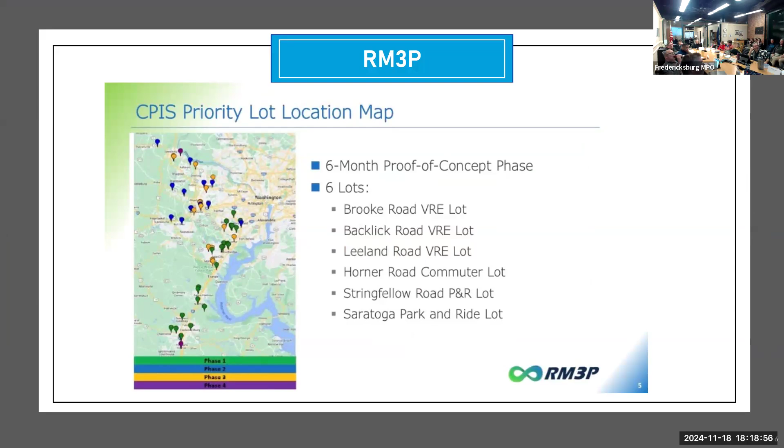Thank you. Eventually it will cover Fredericksburg and VRE, correct? Okay, gotcha. We gave them a list of all the park and ride lots. Perfect, so that's all covered, assuming that it works.

So it's working at a university campus right now, so we're assuming it will work here as well. But it is fairly new technology. It's not often that state institutions adopt brand new technology, but in this case we are. So far, so good, seems to be working.

Let's see what happens. What does it use to count the cars again? Is it phones, you said? It uses phones to locate how many vehicles drive in and out of the lot, so it can calculate the totals of vehicles in the lot. And they subtract that from the available spaces, then they send you the information to your phone.

If this is successful, would there be opportunities for localities and other groups that run public parking lots to link into this? I'm thinking of the city, we run parking garages, and if it was all on one app for the whole region, that would be convenient.

I don't know that it works then, it also collects money. There are some apps like at Virginia Tech, they use Park Mobile, and that doesn't tell me what's open, but it takes my money. I'm just thinking in terms of providing availability data.

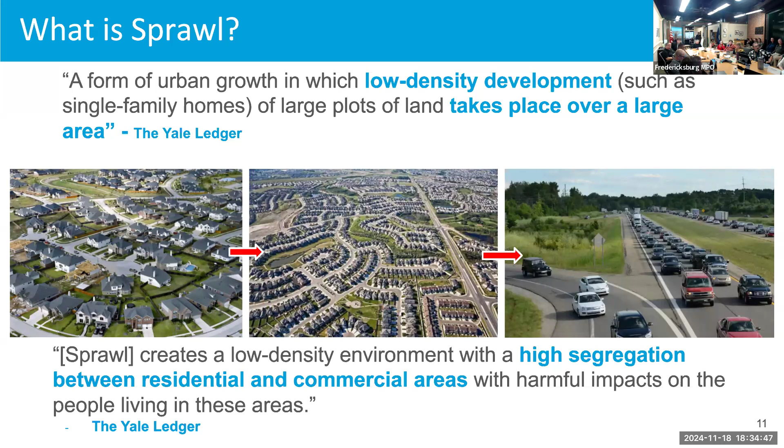But what does this have to do with transportation? As these developments are spread out, the distance to get to the destinations you're trying to reach in your day-to-day are further away. Also, I think a key characteristic of suburbs are cul-de-sacs - a lot of times these residential developments are all kind of isolated off of one main route. So you have farther to go, and all of these developments built up along that one road have to use that one road. So there are more cars on the road because you have to drive everywhere, and all those cars on the same road can lead to congestion, like we're thinking about now with the new travel demand model and the maps we've been putting out.

So it does definitely have a link to transportation. To contrast that, we can talk about dense development. The D word. And what I want to emphasize, and what I've really enjoyed reading about looking at dense development, is actually how diverse it is.

I think those who are averse to dense development have this one giant apartment complex in mind, maybe brutalist architecture. But there's a lot of different ways we can achieve density in development. It's not just apartments, but garden apartments, multiplexes, multifamily housing.

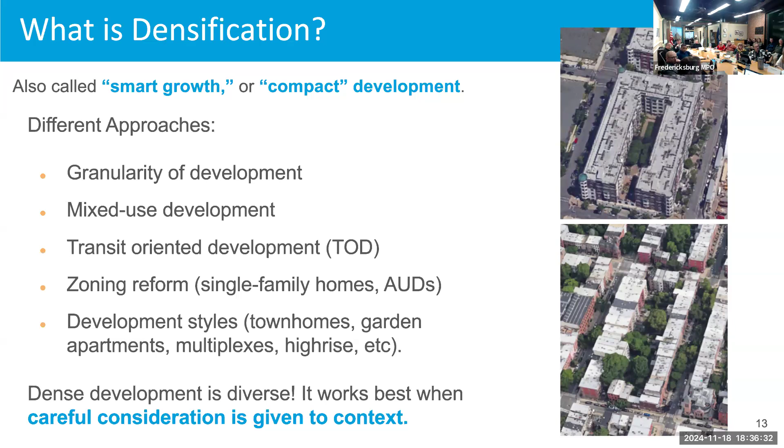And also what I've really enjoyed reading about specifically is granularity of development. So I'll go to the next slide, which has some photographic examples of dense development. These two are in Hoboken, New Jersey, just across the Hudson River from Manhattan. And this middle image is from Georgetown in DC.

You can see here this granularity I was talking about, where this whole block was developed by one person creating all these units, rather than the more diverse ownership of just splicing up the land, but still making development dense on that same land area.

The same can be said for different uses of development, like if these are all storefronts. It essentially condenses the destinations of where you're trying to get. And so then options for travel like transit and walking, biking are a lot more viable. They're possible in these communities, when in the suburbs it's a lot more difficult for those to be viable transportation options.

Chickens. On the roof, yeah. Have you got chickens?

That's another great thing about dense development, is it also really preserves open land outside of the urban center. We have a lot of people — just in our region we can think about the population growth that is projected through the year 2050. And if all those people want their own home with their 1 acre or however much land, we won't have these swaths of open land anymore.

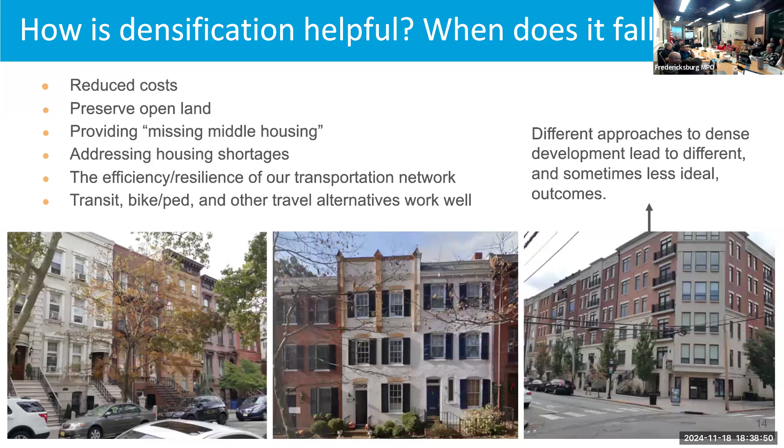So that's my presentation, thank you for that. There's a lot to it — we could probably debate this till the cows come home, because it's like poking a bear for me. So thank you for that. I need to come down from my little anxiety attack I'm having right now.

You'll know that we as FAMPO can't tell jurisdictions what to do, but we just remind you of what's going on around you. I know what they're moving away from, but that red is what we worried about. We have very diverse counties here, and while I'm appreciative of anybody who desires that kind of thing, that isn't the vibe that I get. I mean, Chris and Drew can say that's not true if they feel that way, but I feel like I need to apologize by saying that.

Let's — but thank you for that. Yes, thanks, Leda. If you have any data regarding everything that you were just telling us, could you send that to us, or have someone send it?

Sure. Then to the converse, have you done any research on land conservation and not increasing land development and density? So like if we did one house per 6 acres, did down zoning, limited the number of houses that can be built in a locality — how that could reduce traffic, and then used the offsetting funds to do land conservation. So if we're going to take one side, I would like information on the other side.

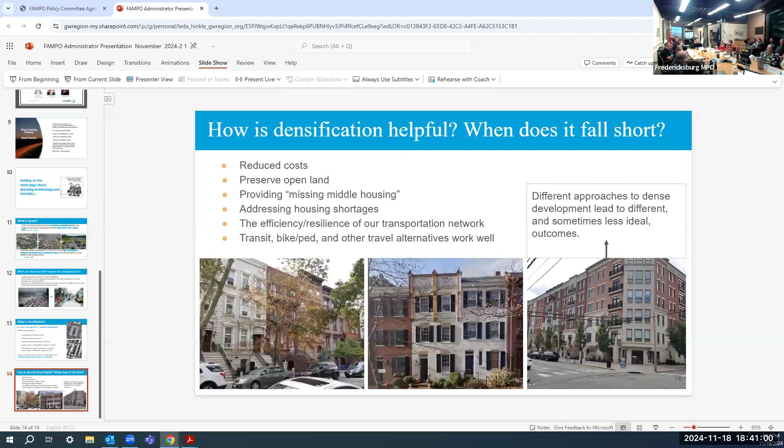Because if you can't spot any difference, then we're wasting our money and our time. But there are some differences, and Leda's going to show you that we've done some work to help you find those differences.

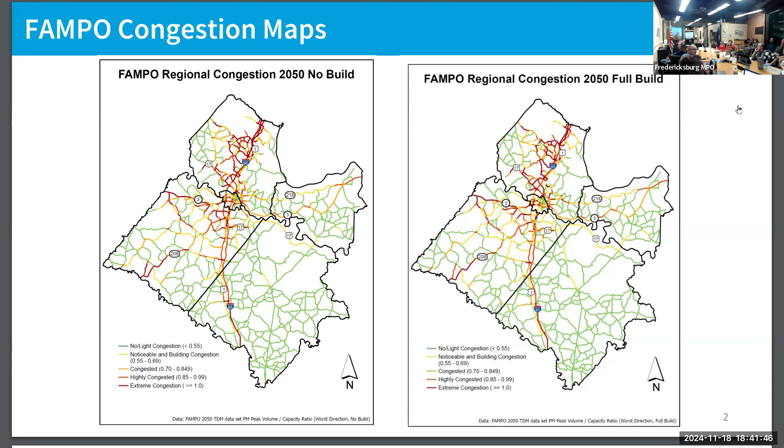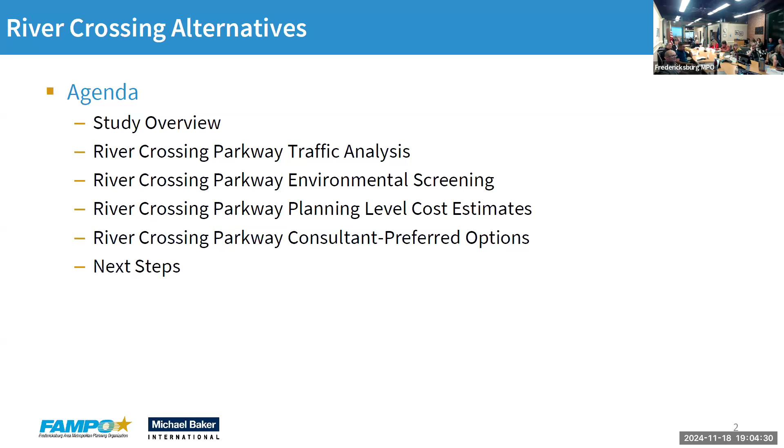So as I was saying, I want to talk through the traffic analysis, we'll get the environmental screening results. We have some planning level costs that we're going to present to you. They were not used in the screening, but we'll share those for information. Then we'll wrap up with the big reveal, which is our top two options based off of what the data and our work is showing us.

Just a reminder for anybody that doesn't know why we're here: we're studying an eventual NEPA certification of a preferred alternative that will hopefully ultimately lead to a funding application for a new river crossing west of I-95 across the Rappahannock River. So the study area is this area just adjacent to I-95. We're not looking way out west, but that's been done before.

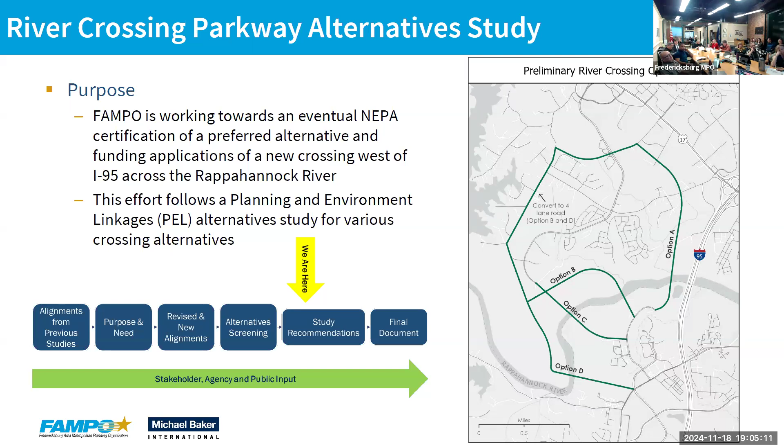So we're moving forward, we're at the study recommendation phase. You can see the steps here. We've identified a purpose, reviewed the alignments, done our alternative screening. So we're not final yet. Keep that in mind, we're not final yet. We're just at the recommendation stage.

One thing I wanted to update you all on: when we went out to the public the first time, we took the four alternatives that we showed you a couple months ago, which was a little washed out, but we had an option A, a B1 that came up this way, a C, and a D.

When we went out to the public and worked with the stakeholder committee, we were informed that option B is going through some prime proposed development areas, so that's not happening. We came up with an option B2, which would avoid that area where we're seeing anticipated proposed development. It still uses the same termini, so it doesn't impact.

Can you give us a little bit more, because I cannot see that. So I see I-95, still golf course property, still golf course if that's helpful. Celebrate Virginia Parkway here, Carl D. Silver, the 17 is up here. Where's Fredericksburg - down here.

City development that got approved after we started the study is around between that mustard line and the purple line down there, just further south, right on the river.

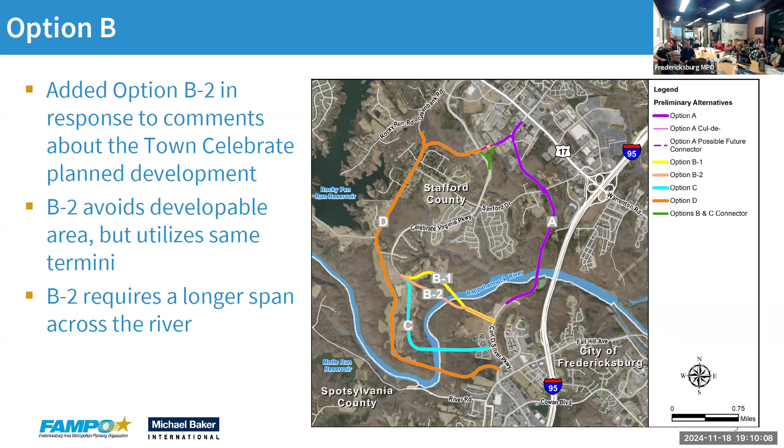All right, I've got it all on the map here, but this is probably harder to see. But anyway, if y'all have questions as I'm going through about which one's A, B, C, D, just stop me and ask, and I'll point to one here to remind you all. Essentially they go east to west, A to D.

Okay, so from the traffic analysis standpoint, what did we do? We really had two main sources for doing the traffic and operational analysis. We looked at the regional travel demand model, the same model you all use for your long range plan, the same model you're getting outputs from that you're talking about tonight. So we looked at that to see what the demand would be on the new river crossing, and whether there's justification to move forward with this, and will this attract traffic. Then we looked at what's referred to as micro simulation, where we get down a little more granular to see how this will function, not just with each alternative, but how the whole network will function with each of these alternatives. We'll go into that tonight as well.

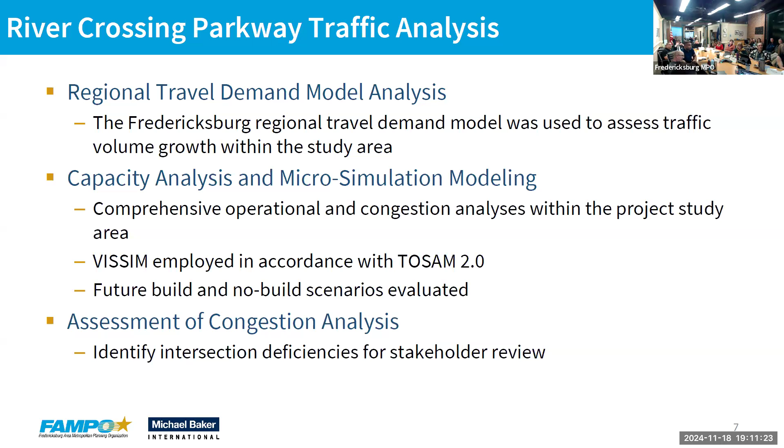So I'm going to start with the findings from the travel demand model. The question we're trying to answer is, how much traffic might this attract? And the answer is a fair amount. Looking at a new river crossing at the various options, we're seeing between 7,000 and 8,600 vehicles during the PM peak period using a new crossing.

So you can see the numbers in the graph here. Option A would attract about 7,000. B1 and B2 are the same because they have the same termini, at 8,590. Option C, 8,170, and option D, 7,895. Most of this traffic would be passenger vehicles. We estimate less than 2% of vehicles will be trucks, so most of this is passenger vehicles.

The principal volume shifts that we would see to the new crossing would be from US 1 between US 17 and the Route 3 intersection with I-95, and then the I-95 local lane. So we would see the most traffic shifting from those facilities to a new crossing.

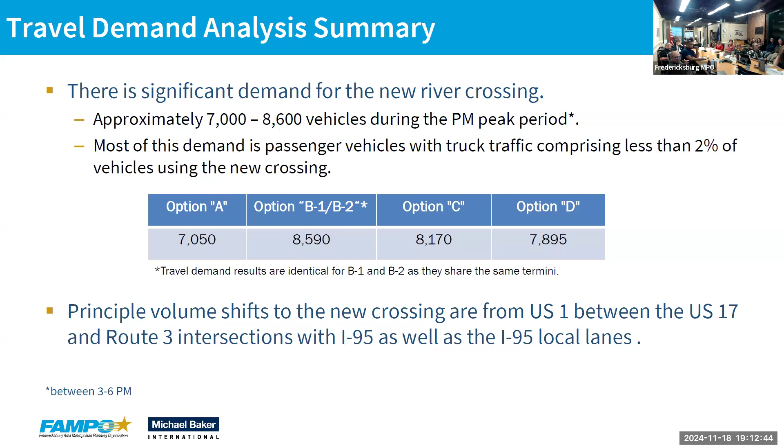Looking at the micro simulation, as I said, we drilled down and looked at how all the intersections within the study area would operate. This is your 2050 PM peak hour. Basically what we're seeing is the no-build in this first column here, and just looking at this, you can see there are more reds in that column than anywhere else. So the good news is that implementation of any option is going to reduce the average delay in the region and enhance the overall operational performance of the network.

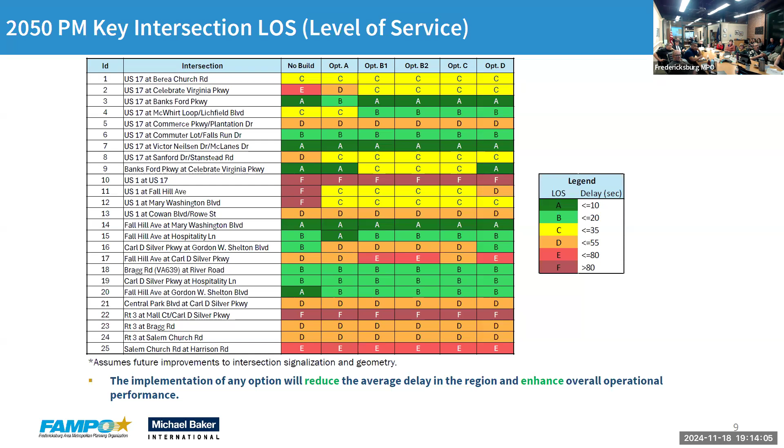And let's see what this looks like. We talked about volume to capacity earlier. The way we look at intersections is level of service, which we measure in seconds of delay. Delay is defined as how long you're sitting there in excess of normal travel conditions. So if you're sitting there for less than 10 seconds, you're level of service A. Once you start getting over 80 seconds, you're in E-F territory, and that's really where you're not moving at all. So really what we're trying to focus on is getting rid of those E's and F's in the network.

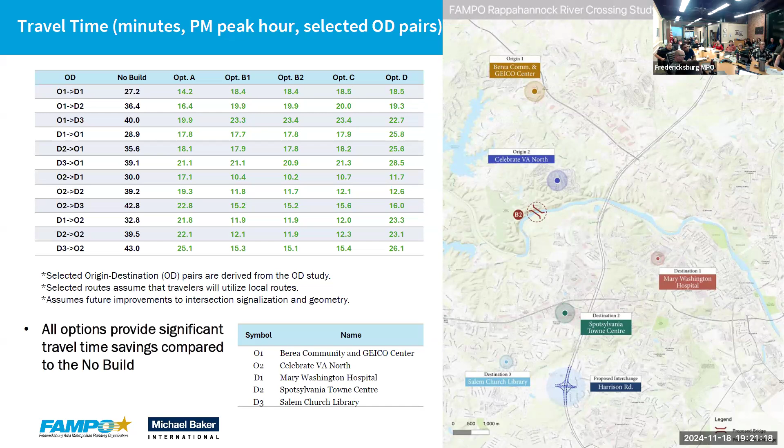Okay, moving on to the next factor, the environmental factor.

The way we did the environmental analysis is we took a 250-foot wide study corridor and applied that to a map to see what we're hitting in that corridor. But one thing to keep in mind is that the actual facility is only estimated to be about 100 feet wide. So even though we're looking at impacts within 250 feet, the actual facility will only be about 100 feet.

The idea is that when you get to the design stage, things you're potentially impacting, such as someone's home, you have some ability to maneuver and do what's called avoidance. The representative typology we're expecting for this facility is a 4-lane divided road with a multi-use path. That's what we assumed, and that's how we came up with that 100-foot wide width.

Before you move off that slide, it's very important to grasp this: the study corridor is 250 feet wide, but you're not going to build a 250-foot wide roadway—you're going to build maybe 100 feet. Some of the impacts you'll see now in the environmental study won't actually happen; it's allowing for the maximum possible width, not what's actually going to be built. In none of the options would you build 250 feet wide. That's a key thing to know as he now goes into the factors. So they've taken how many properties will be impacted in the 250-foot corridor, which we would never build—so it's going to be a lot less than the numbers he initially shows you.

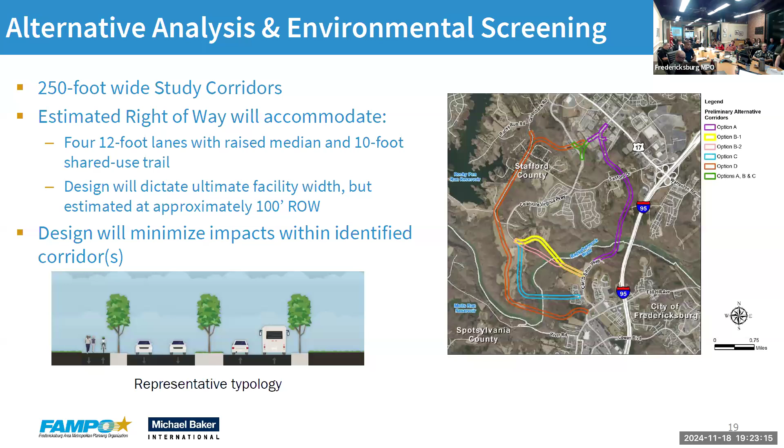Slide back a little bit. There we go. All right.

We used what's technically referred to as secondary data sources, which essentially means data sources from federal, state, and local sources. We followed the NEPA process—this is a planning and environmental linkages study we're using—so we want to make sure we're doing everything in accordance with that process, so that eventually, if we do get to a NEPA phase, we can hand that over and the data won't be refutable.

We separated the impacts into high, medium, and low by looking at the range and dividing it into thirds, and then we color coded it. Unfortunately you won't be able to see it well, but I apologize for that.

I just want to run through what we looked at, first off the purpose and need. The purpose and need that we discussed and vetted through the public and the stakeholder committee is whether or not a new facility would help establish an interconnected grid system of roads, establishing that north-south corridor on the western side of 95.

It would establish a new multimodal connection across the Rappahannock River, supporting bicycles, pedestrians, and transit. And would it create additional routes for emergency responders, as we identified a need for when there are incidents on I-95 and things go haywire in the region when you cross the river. So first off, all options supported the project's purpose and need, so no issues there.

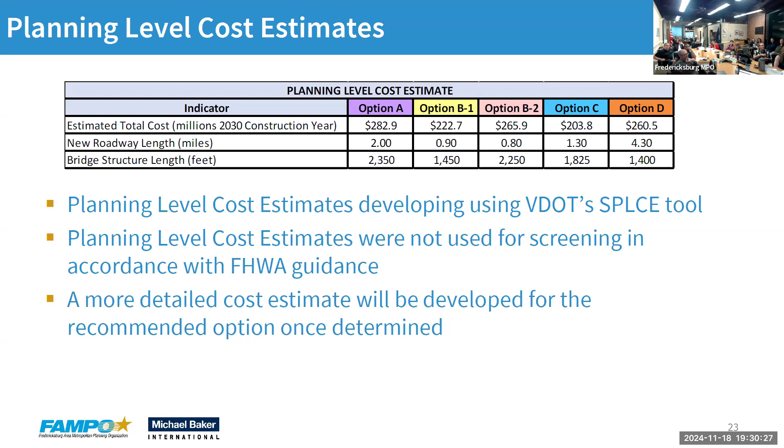And option A has that extra little bridge over Sanford Drive. Correct, which if another option were implemented at Sanford Drive, that could bring the cost down. So yeah, there are other options.

Okay, all right, the big reveal, the consultant preferred option. So going out to the meeting Wednesday, we wanted to have two front runners to try and really get input on the two that we think are the most viable. Of course, folks can provide input on anything. If they hate these two and really want option D or whatever, that's fine.

The first thing I want to mention is, off the top, we decided that option B1 and B2 were so similar in everything that we just saw that there was really no reason to advance B1, because B2 avoids that proposed development. They both accomplish the same thing, but B2 has a reduced impact on that proposed development. So right off the top, we decided that needed to happen.

Sure, so I just have a question about this proposed development. Who brought that forward to you? So we had county staff point it out, in the stakeholder group. And it's not by right? It has to be approved by the board of supervisors. It's one of the Del Webb projects that's in just the works.

I'm just curious, it's not a by-right project. I understand that, but you're acting like it's a good thing that we want to avoid it. I want to cut right through that. So why would you avoid that option? I'm just like, who gave you that direction?

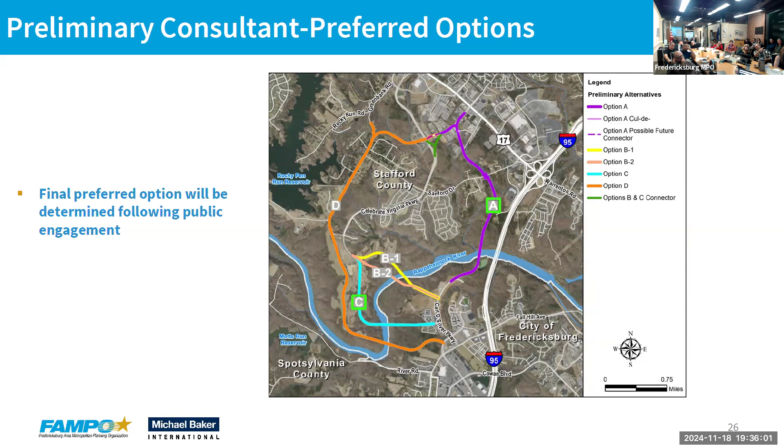So either way, 3 of those options are using Celebrate. Correct, yes, 3 options are using Celebrate.

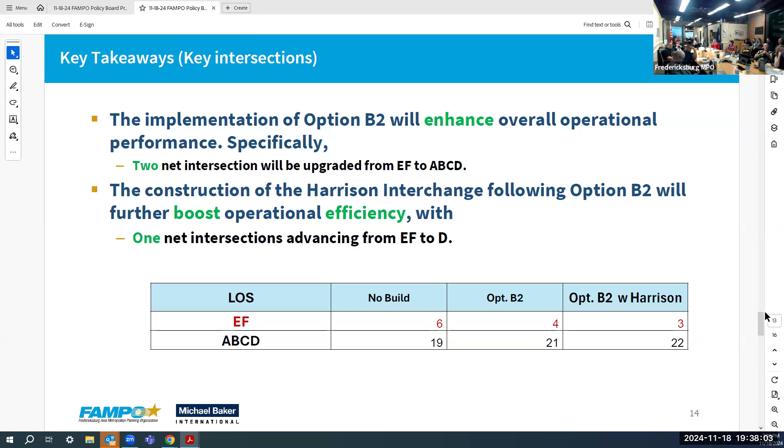There's a bit of good news for you on the Harrison Road front, so we'll show you that next. Oh Pam, did you have any questions? No ma'am, I'm good. Awesome, thanks. I'm sure Drew likes Harrison Road, he was interested in that. I'm messing with him online. All right, ready to jump into Harrison Road? Yep, let's crack on. Okay, let's go.

In addition to the river crossing analysis, we were also asked to do a separate analysis to say, okay, what will happen if we build a river crossing and we do the Harrison Road interchange? We understand the Harrison Road interchange has been modeled by itself, and of course we've modeled the river crossing by itself, but they hadn't really been done together. So we wanted to look at the aggregate benefits of both of these potential projects, using the travel demand model.

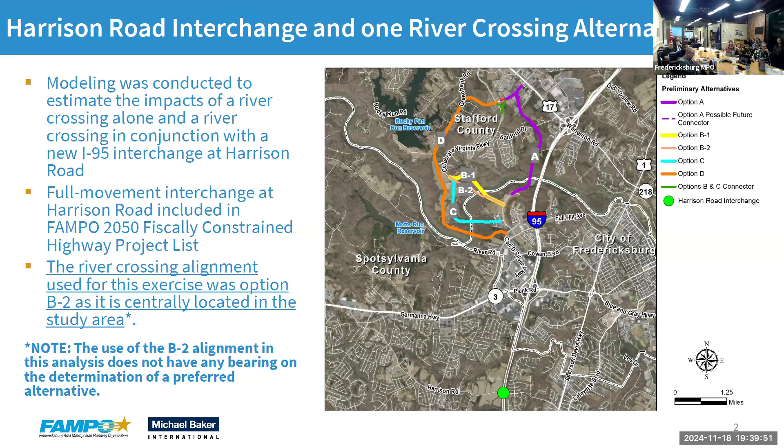We used the travel demand model, which we did in the previous slide deck. We used alignment B2 for this exercise, which is the one right here, only because it's in the middle. We had not developed all the results you just saw in the previous presentation when we started this exercise, so we didn't know how the 5 options would shake out. We said, we really just want to see cumulatively, if there were an arbitrary line across the river, how would that impact Harrison Road with the Harrison Road interchange? So we just used B2 because it's in the middle—it has no bearing on our selection of the preferred alternatives for the river crossing. So just like we saw before: is there demand if we have both of these options?

Significant, again, PM peak period used again. Yeah, significant demand for a new river crossing.

I'm sorry, can I stop you for just a second before we go? So you're using B2, but the preferred one is A, right? So are we really getting a true representation? Why wouldn't we want to look at both of those options?

Well, we did these in parallel. We didn't have the results from all the other modeling in order to do that with the Harrison Road. The Harrison Road was to take one option, so we didn't know which would be the front runner when we did this exercise. So we said, okay, let's just pick one that's centrally located, and that should really give us essentially the average, because we're not getting the extremes of an A or a D.

Yes, you might see a little change if you used option A. It's not going to be significant, to be honest. It'll probably be within the error of the model. So that's why. And the results that we saw in the last presentation, we just got those last week. That's hot off the presses. All right, thank you.

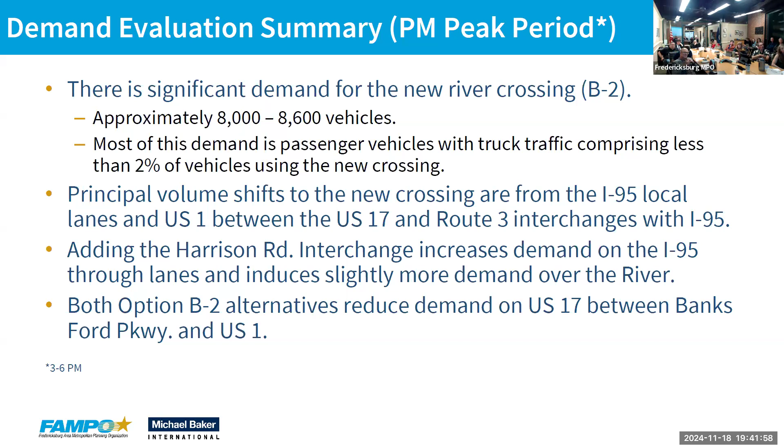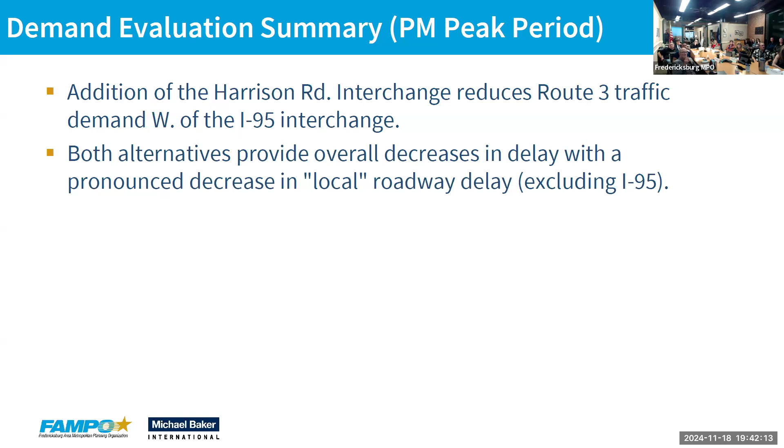Both option B2 alternatives reduce the demand on US 17 between Banks Ford Parkway and US 1. And we're going to show a map here in a second. The addition of Harrison Road also reduces the Route 3 traffic demand west of the I-95 interchange. And both alternatives provide overall decreases in delay, with a pronounced decrease in local roadway delay. Let's see what that looks like. Okay, you can't actually see this. This is good.

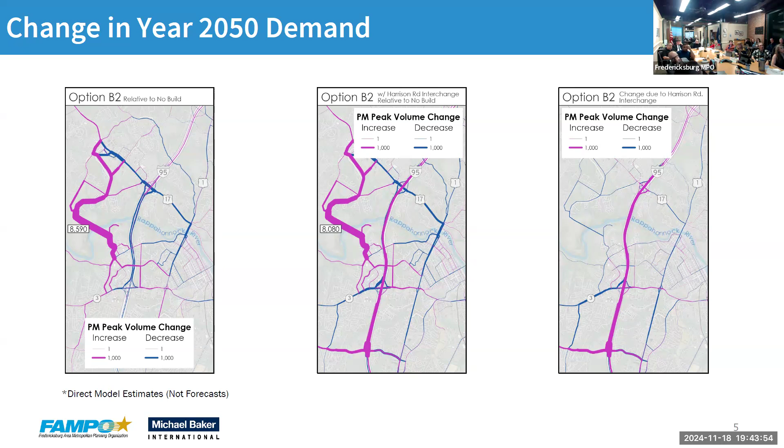If we look at just the crossing volumes across the river, these are all the crossings in the Fredericksburg area. You see on the 95 through lanes, we do see a slight uptick; we're at 10.9 with the no build, it goes up to 12.5 with Harrison. But again, you'd expect that because you're putting a new interchange, you're going to use 95 to get to that new interchange. The local lanes, you see a little bit of a drop going from 21.2 to 20,000, so about 1,000 vehicles drop. US 1 bridge going from 12,000 vehicles to 9,500, so a not insignificant reduction on US 1.

Chatham, slight reduction. Ferry Farm, looking at maybe net 600 vehicles reduction. So really across the board, on your local crossing options, you're seeing a benefit.

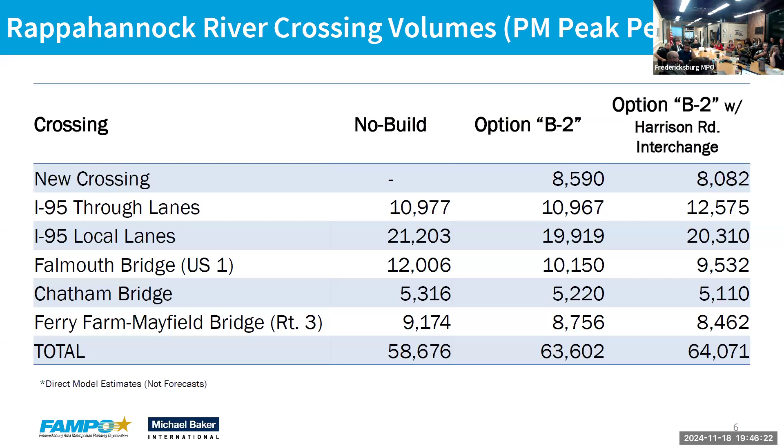Again, it's slight. It's 1,500 vehicles at peak period. So we're not shifting I-95 traffic to the local roads. What we are doing is making the local trips better by a large amount. Significantly.

I think that was the goal of the study, so that's pretty good.

So I assume you cannot take from this that it tells you anything about doing Harrison Road by itself without the river crossing. Correct. We weren't tasked with doing Harrison Road by itself.

Okay, I believe, have y'all looked at this model before? That was a long time ago. Right, right? Yeah, 95 stuff. Yeah, that's been assessed already previously.

The task here was to say, we build the river crossing and we build Harrison Road, what happens? Is there a net benefit by doing both, rather than one or the other? It just looks like bang for buck-wise.

The local road congestion is improved more by Harrison Road than by the river crossing, or is that a mystery? Depends where you're counting. So for example, US 17 improves a lot by building the river crossing bridge, but Route 3 improves more by building the Harrison Road interchange.

Right, okay. However, if you put the two together, you get the best of both worlds, because then Route 3 gets better and 17 gets better and US 1 gets better, and Salem Church gets better. So the cumulative effect is quite a lot better than just building the one. But of course it costs more money, so.

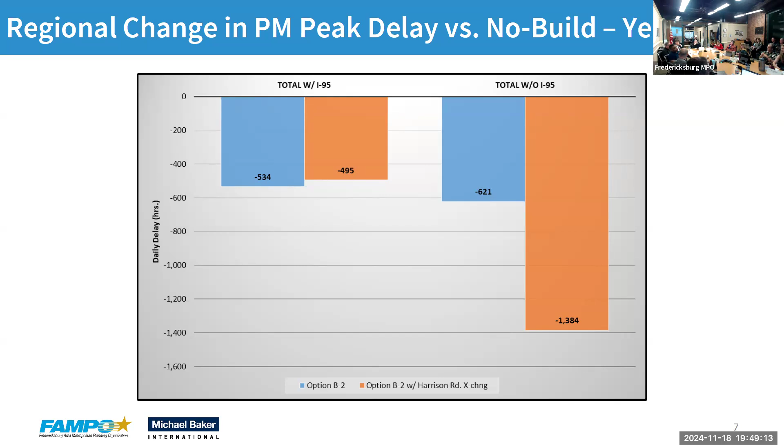But we've said publicly that's what we're going to do in the future one day. So we've said it.

Right, let's look at intersection delay, which I know everybody loves. Again, just as we saw in the previous slide deck, we looked at the intersection delay. Now, keep in mind, the difference here is that what we saw in the previous slide deck were distinct, different findings. These are cumulative.

So as you go from left to right, you're seeing a cumulative impact, and the colors suddenly show up now. Oh, the projector suddenly decides to work. Well, we're going to test it here. She'll pull a map up here in a second. We'll see if it really works.

Yeah, this one. Oh yes, we do see a decline in that one.

There's a reason for that, because when you put the Harrison Road interchange in, all the traffic comes onto Harrison Road. That's obvious, unless you widen Harrison Road. But the point is, when you build the Harrison interchange, you have to widen Harrison Road. It's part of the deal.

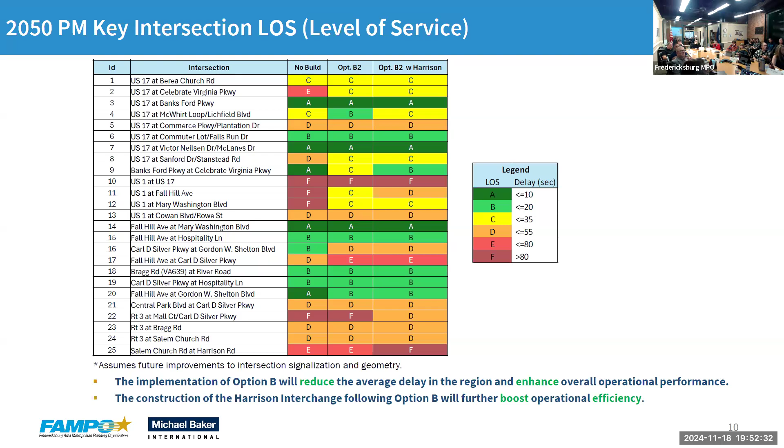You can just off the bat see it go from 1, 2, 3, 4, 5 reds to 3 reds. So we're improving the network, but that doesn't mean there's not still work to do. The projector's still broken.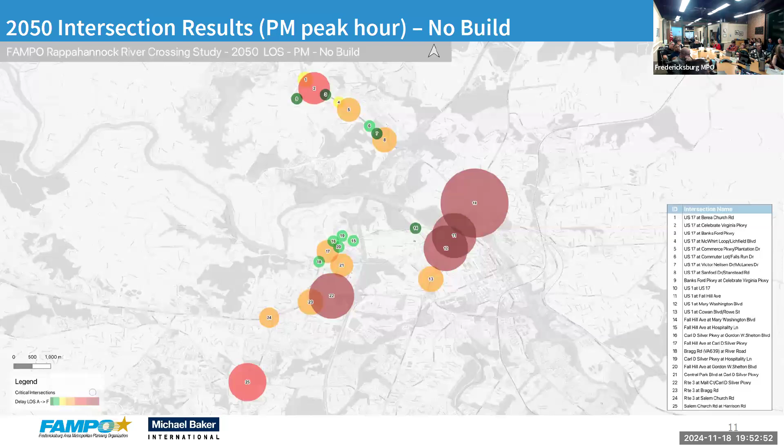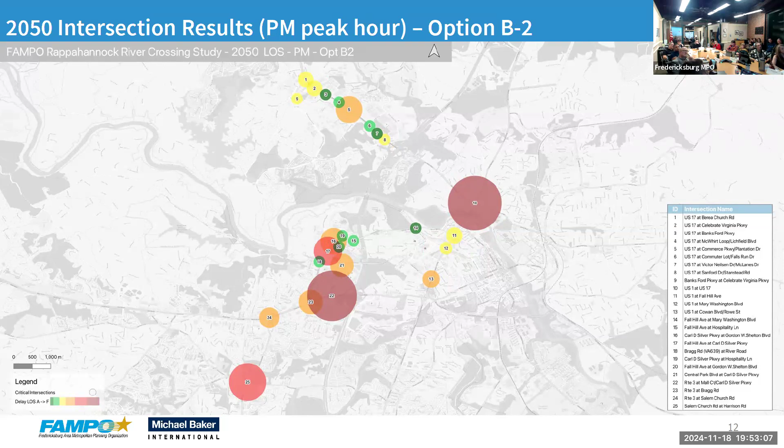So if we look again, this is the no build, the same map we saw before with lots of big red circles. If we build a river crossing, we see the red gets smaller, and this is B2 — one of the ones that still had red on Carl D Silver and Fall Hill. If we add Harrison Road, you see those circles shrink down even further, so you're seeing a cumulative impact.

So we'll do it again: no build, river crossing plus Harrison. But Harrison remains pretty much the same, gets a little worse. That's because we're building an interchange there.

So as Ian was saying, widen Harrison, look at what's going on at that intersection, and you can mitigate a lot of those impacts through looking at signalization, modifying that intersection. Could be turn lanes — I don't want to say the roundabout word, but there are options out there you can look at to mitigate.

When you looked at Harrison, did you look at what the impact of doing that at Harrison would be, as far as takes and all that stuff? So we just looked at the impact from the river crossing perspective, from the environmental impact. We did not study Harrison Road itself — we just put it in the model to see what it would do from a traffic standpoint. Yeah, that's all we did.

And then they did micro simulation as well on those intersections to tell you what will happen to them. They didn't do an environmental study of Harrison Road.

Because I'm just, knowing that road, there's some new development that is fairly close to it. That one new development — all of the right of way for the expansion of Harrison was supposed to be in there. I voted against both of them, so.

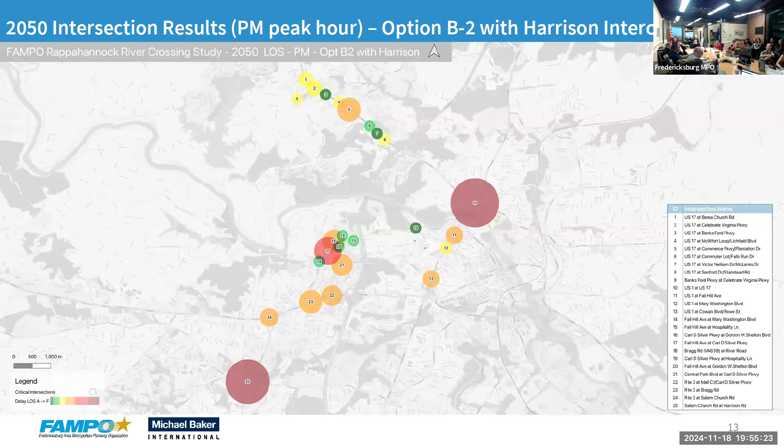That's the study we're starting to allocate funding for in Stafford - Spotsy, I keep saying Stafford. Is there any federal funding for this? For the bridges? I'll report everything - there is no funding at this stage on anything.

You have to apply, really? We are working with VDOT at the moment on what it would take to make sure this would be a smart scale application, for the river crossing. There are certain documents you have to produce, certain numbers of things you have to consider, so we're working through that. A smart scale application, if successful, would be funded 100%.

We could also consider a federal grant application, but almost all the federal grants that could fund large projects like this have a 20% local match. We can apply for those, and there are grants every year they open for applications. But if we do that, it would be on the understanding that we'd need to raise the 20% local match through some other means in the region, because the federal grant will only pay 80% of the cost. So that's where we are right now, today.

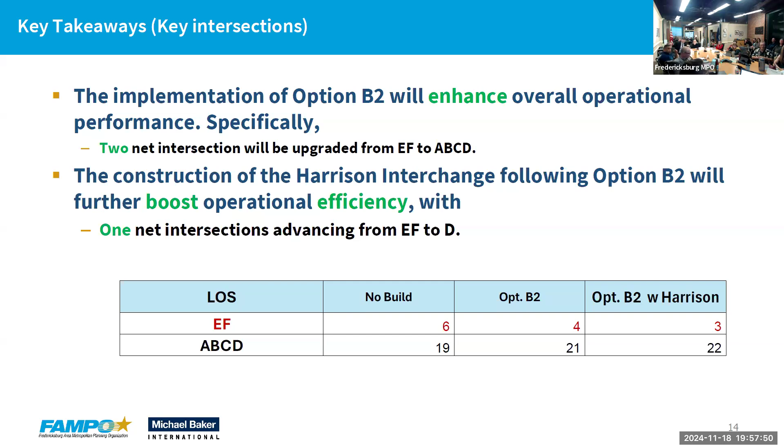We did the peak hour origin-destination analysis again, just like we did in the last slide, and again these are cumulative this time. So you're seeing going from 27.2 to 18, to 16, to 36, 19 to 18 - quite a drop in the number of minutes it takes to get between these origins and destinations. For the most part, I think they all get better, with the exception of this one, which actually gets a little worse for some reason.

But it's still massively better than the no-build. Yeah, it's still significantly better than the 40. The difference is just 3 seconds from what it was before - the difference is tiny, from 11.9 to 12.2, it's 3 tenths. A tiny amount, yeah.

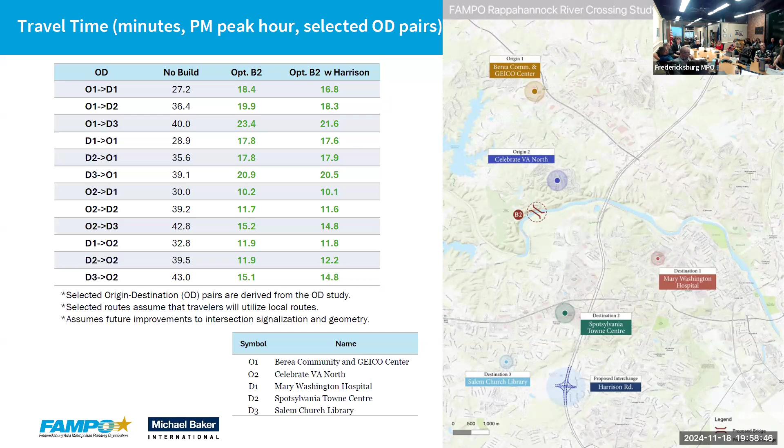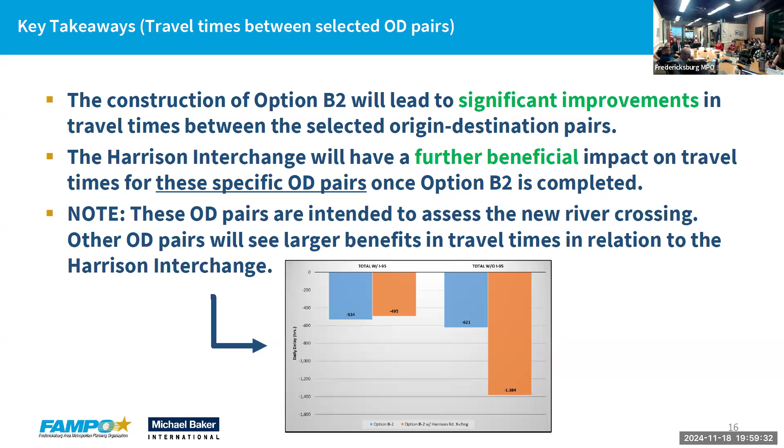So this just says what I just said. One thing to keep in mind is these are the O&D pairs we picked for the river crossing analysis. If you were to pick O&D pairs further out in the region, given what we see about this total impact on local roads, I think you'd see that trend follow regardless of where you dropped O&D points, because of that massive reduction in delay on local roads when you have these two projects together. That was beyond our scope, but we wanted to point out these points are specific to the river crossing - there are probably even better points you could pick if you just want to look at the impacts of Harrison.

Does anyone have any questions? Thank you very much for that presentation.

Apologies again, I don't know what's wrong with the screen. So we need to give you a new projector, is what you need? Yeah, we think we've got to get a new projector - that's what needs to happen. Would you check? Yeah, I'll talk to you. Let's get one out of Spotsy's building.

We will email you the full bright colored ones, but tomorrow morning you'll get them - apologies, we'll send them to you. I just want to make sure I'm clear, because this is happening in my district, and I'm going to have to answer questions probably tomorrow. So it's going out for comment - you're gonna have to walk through that door first.

Comments Wednesday in the ballpark. Then after that, what is the next? So we're not shutting down the public comments. We're leaving it open. Till when?

The last time we did this, it was around the same time of year, and I remember you said, should we not just keep it open through the start of the new year because of the holidays? Yeah, we think that 30 days is the minimum, but we can keep it open like 45 days. It wouldn't be any problem to us to do that.

It just gives the public more time to comment, if that's okay with you all. And then the consultant will be making the same presentations to our other three committees, so they get a chance to also look at this and discuss it in their committees. Then the results of the public comment and all of our committees, including yourselves, will be collated by the consultant.